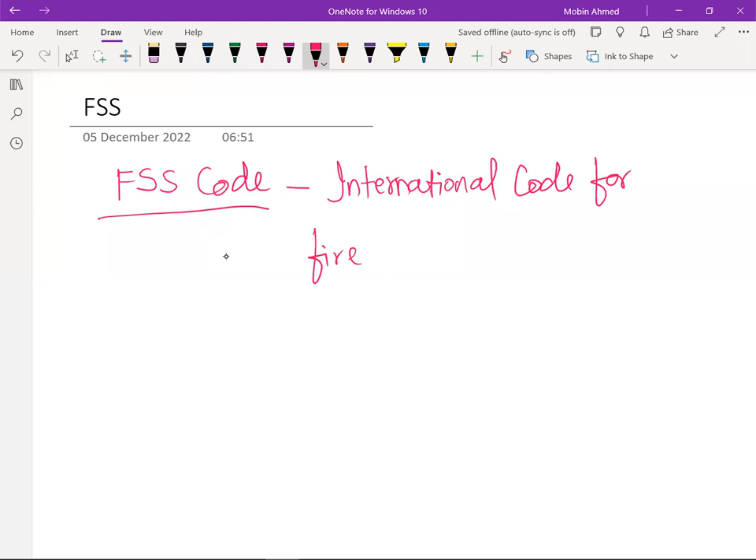Today we'll see about the FSS code, our international code for fire safety systems. This is basically a code, and we must refer to SOLAS also along with this, SOLAS chapter 2-2.

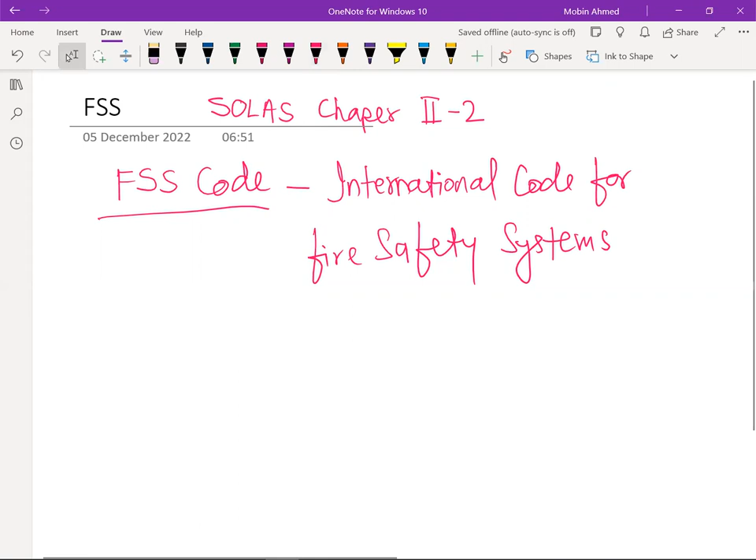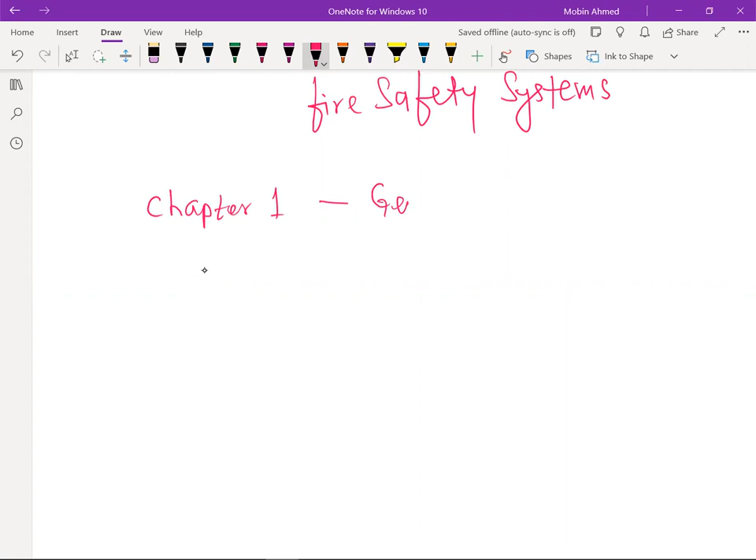In this we are going to have chapter 1, which we will go through chapter wise. Chapter 1 is general, that is general definitions and all that is given in chapter 1. So all the definitions you are going to find here.

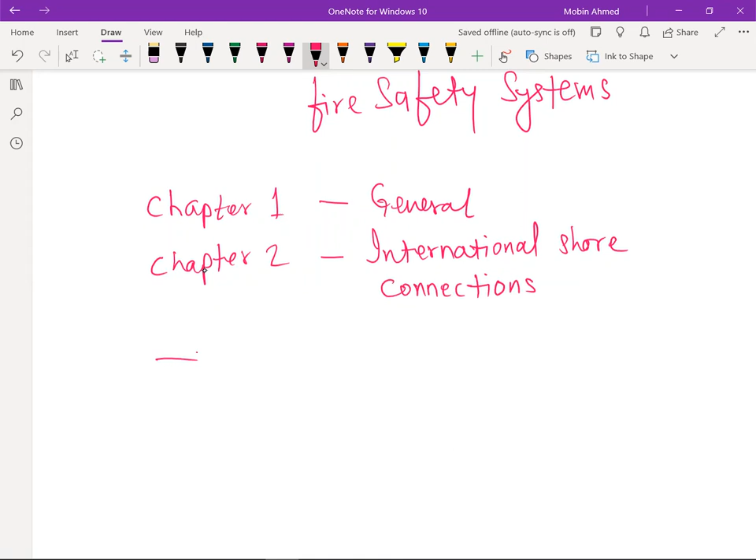Chapter 2 is about international shore connections. Chapter 3, personal protections. Chapter 4, fire extinguishers. Chapter 5, fixed gas fire extinguishing systems.

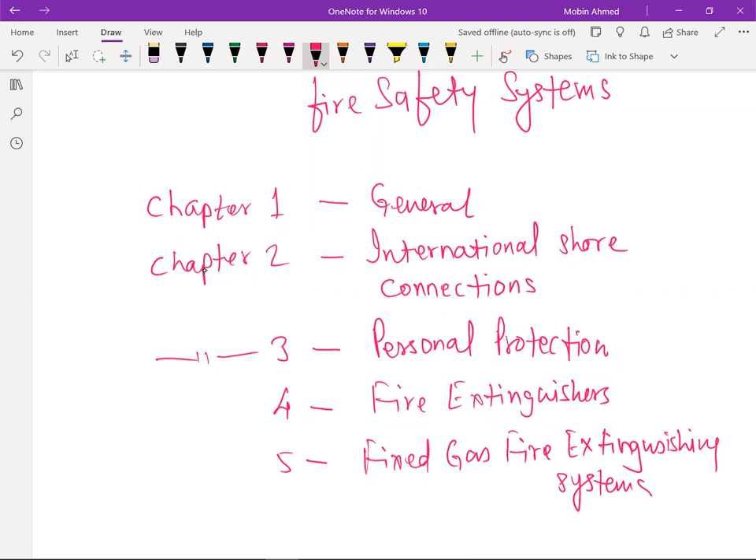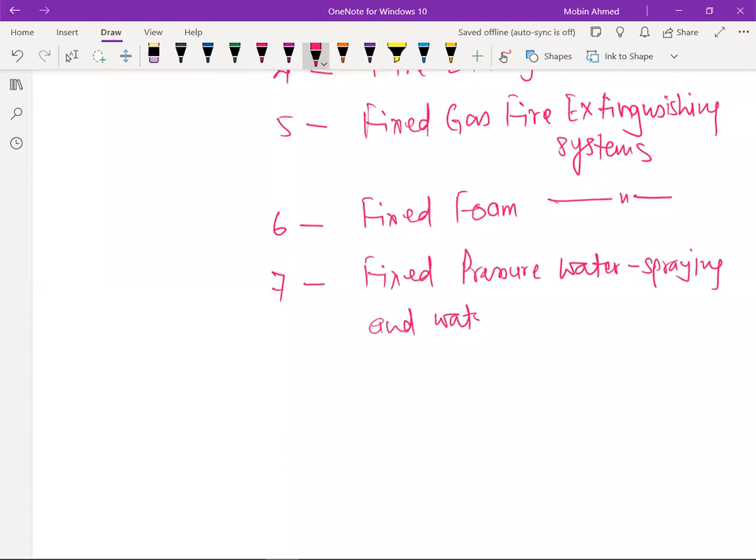Chapter 6, fixed foam fire extinguishing systems. Chapter 7, fixed pressure water spraying and water mist fire extinguishing systems.

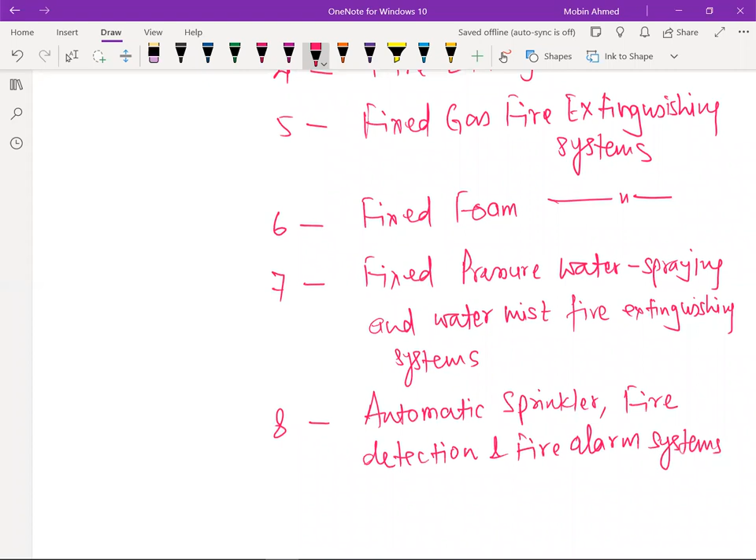Chapter 8 is automatic sprinkler, fire detection and fire alarm system. Chapter 9, fixed fire detection and fire alarm system.

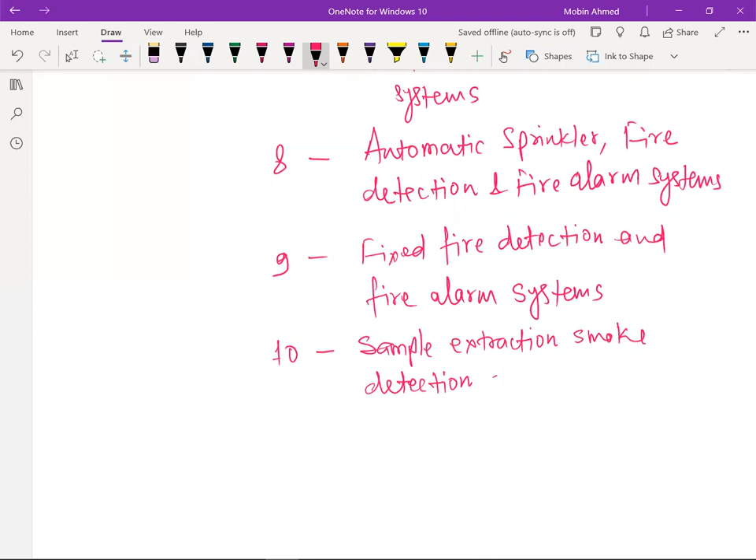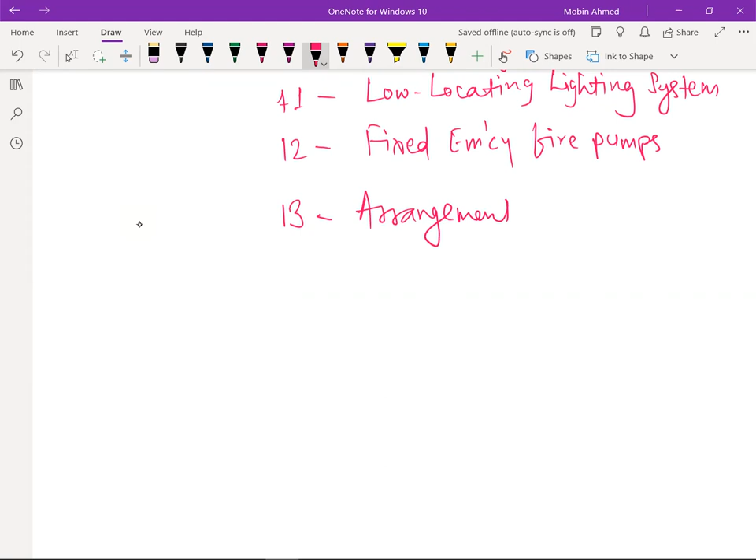Chapter 10, sample extraction smoke detection system. Chapter 11 is low locating lighting system. Chapter 12 is fixed emergency fire pumps. Chapter 13, arrangement of means of escape.

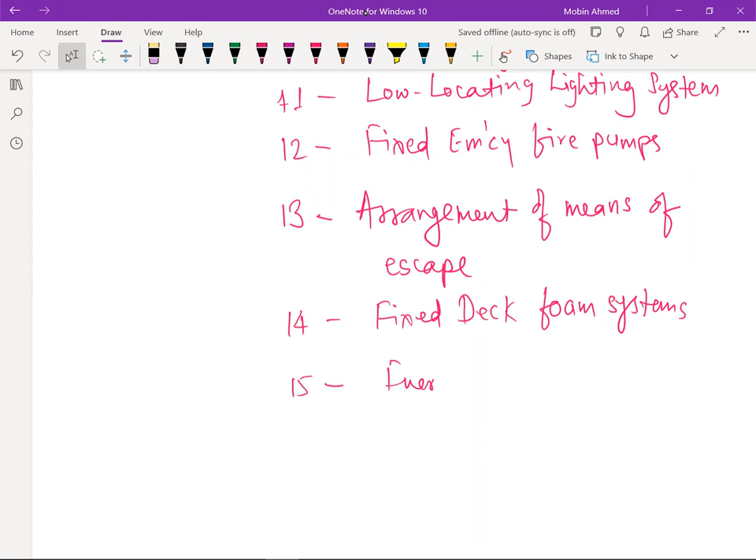Chapter 14, fixed deck foam systems, and chapter 15 is inert gas. Okay, so this is the chapter wise listing. I hope I have completed all, yes, up to 15.

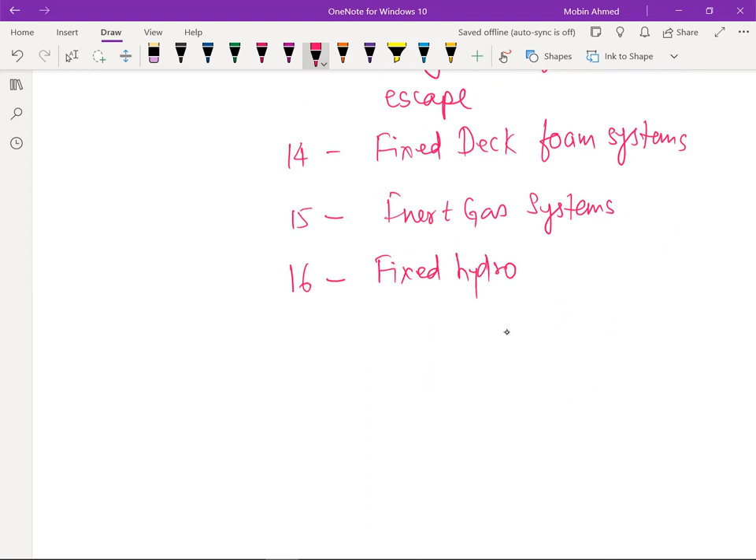Okay, so this deals with FSS along with chapter 2-2. And there is one more, chapter 16, that has come newly, that is the fixed hydrocarbon gas detection systems. It is annex wise also in the FSS, you will find many annexes there, giving all the guidelines in the FSS code. This is the new one, chapter 16, fixed hydrocarbon gas detection systems.

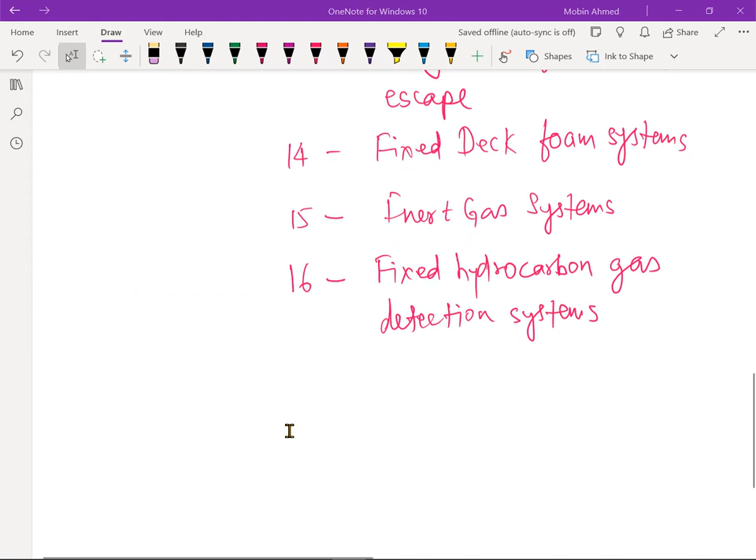Today's topic we will take only the firefighting systems, that is fire extinguishers. Then I will cover fixed fire extinguishers, and all this I will be covering one by one. Today we will cover this part, fire extinguishers.

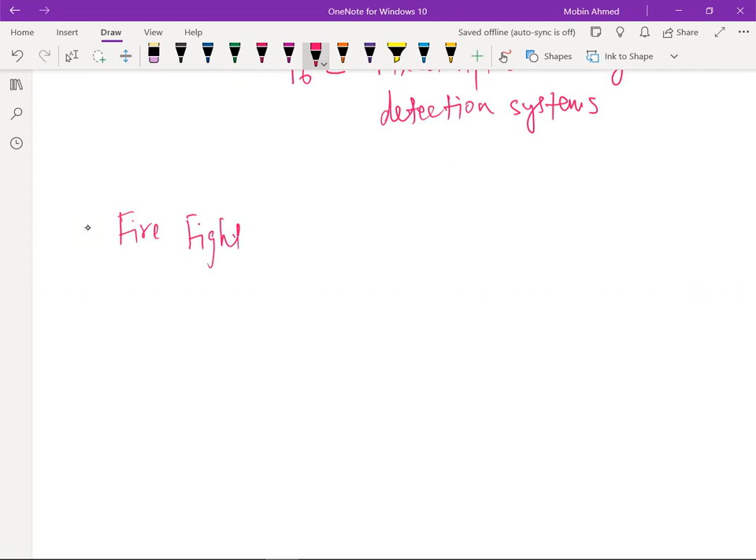Firefighting appliances: if we see the firefighting appliances, in that one we are going to have basically portable fire extinguishers, then fixed extinguishers, then fireman outfit, and other critical appliances.

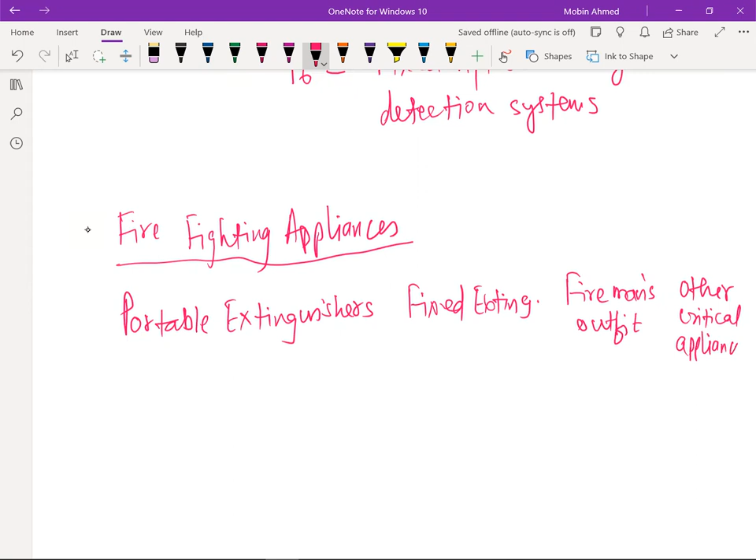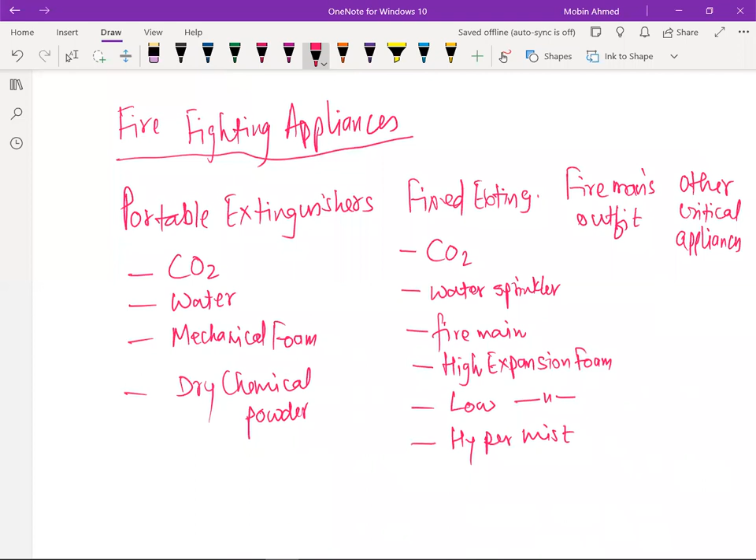Now there are classes of fire. Class of fire, if we see, that is given in the FSS code.

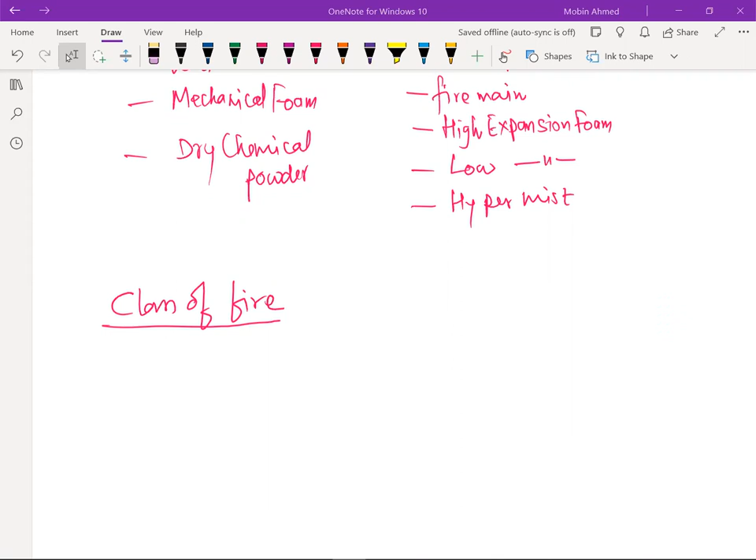So class of fire given in the FSS is class A. This is for carbonaceous material, and we are going to extinguish this fire mostly by using water. That is the class A fire.

Then there is class B. This is about oil fire, we are going to use foam, DCP, or CO2. Class C, that is gas or chemical fire, we use only DCP in this.

Then there is class D, this is a metal fire, we are going to use DCP only. There is nothing like electrical fire, but all these fires can convert into electrical fire, and if there is electrical fire, that is not a class of fire again, it is finished here. There are two more classes of fire, but let me tell you about that also. As per the FSS, it gives the class of fire.

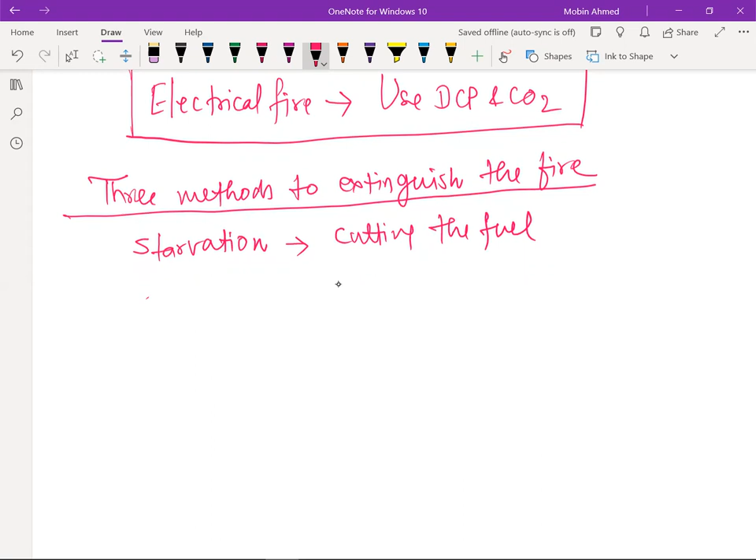Then there is smothering, that is cutting the air, and cooling, that is lowering the temperature. Lowering the temperature.

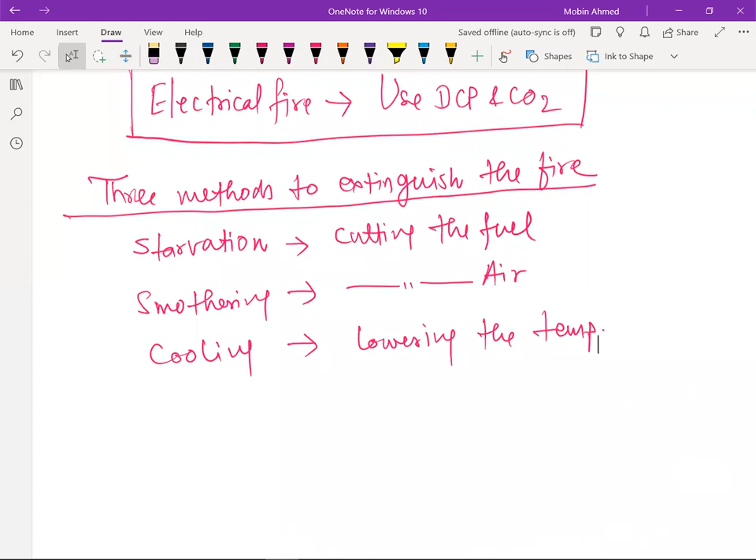Okay. Then there are SOLAS regulations about this. Let's go about this one. So there is a SOLAS regulation, that is Chapter II-2, Part C, Regulation 3. Part C, Regulation 3.

Just wait 1 minute. Okay, let's go about this.

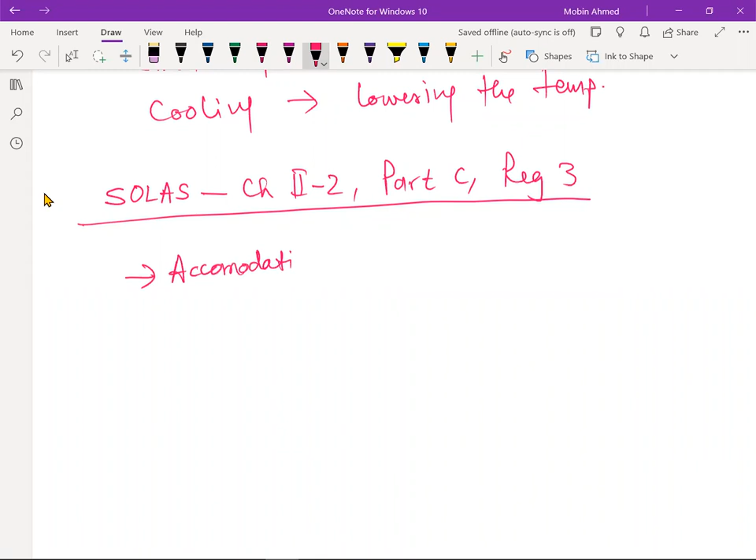So it says that all the accommodation spaces, service spaces, and control stations should have the appropriate fire extinguishers in sufficient number.

Okay, fire extinguishers. Now it says that ships of 1000 GT and upwards are supposed to have at least 5 portable fire extinguishers. So this is about 1000 GT and upwards. They're supposed to have this.

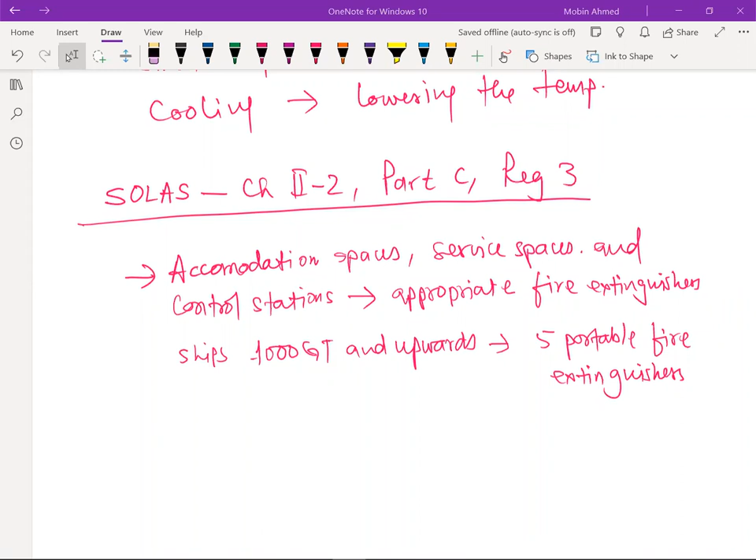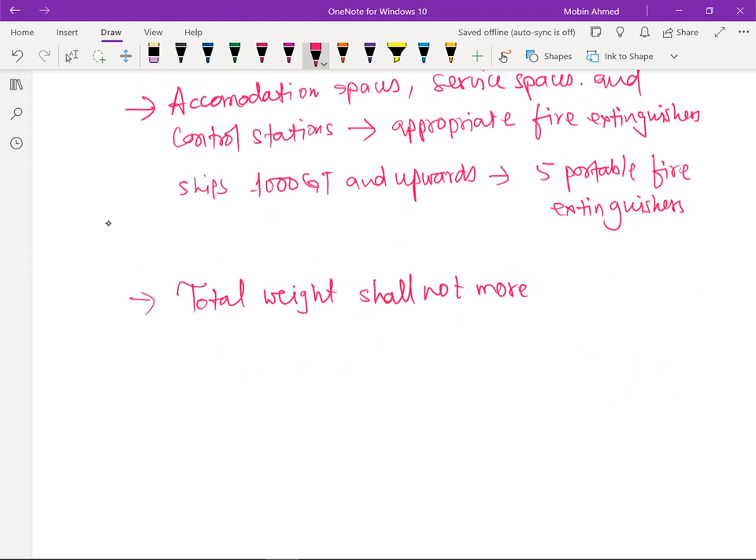And the total weight of any extinguisher shall not exceed, the total weight shall not be more than 23 kg,

and the capacity of fluid not less than 9 liters and not more than 13.5 liters.

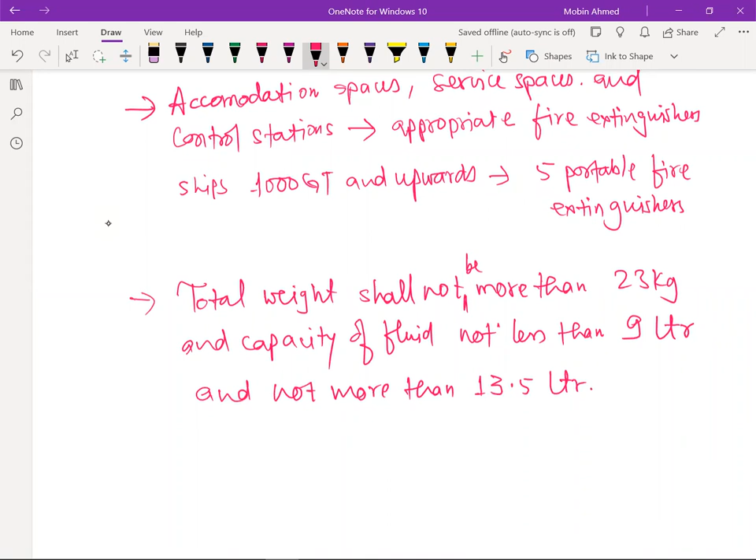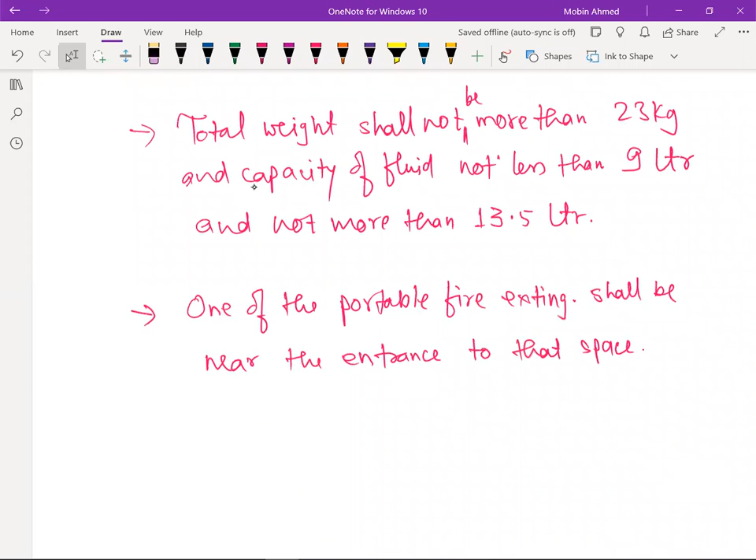Then it also says that one of the portable fire extinguishers shall be near the entrance, wherever we are going to use it, in whichever room or space. So near the entrance to that space. Like if the MSB is there, near the entrance we should have the portable CO2 fire extinguishers.

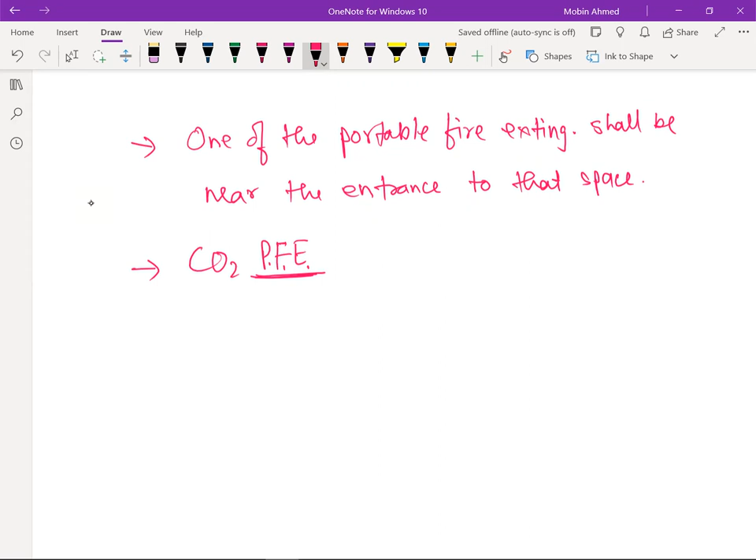Then it says about CO2 fire extinguishers, CO2 portable. Okay, portable fire extinguishers, I am writing in short, PFE. So CO2 PFE shall not be used in accommodation.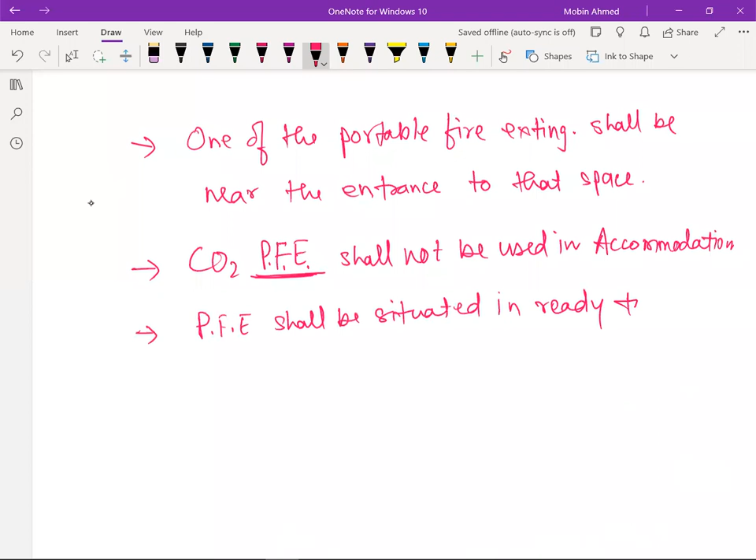Then all the PFEs shall be situated ready to use and easily visible.

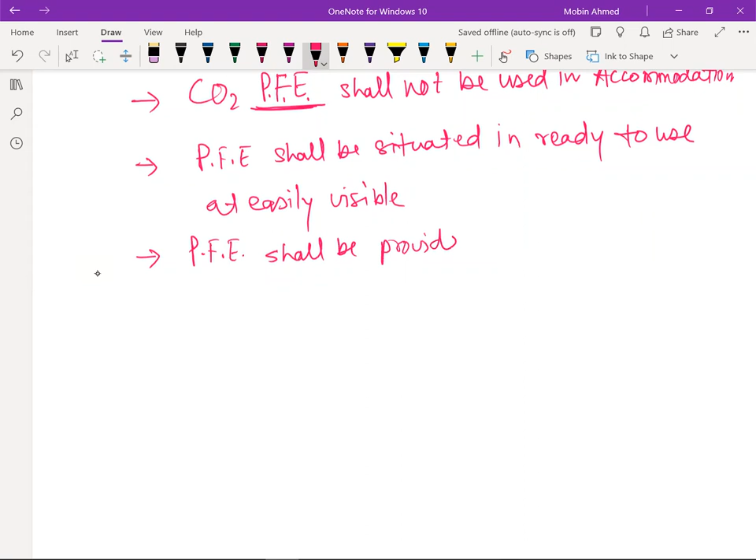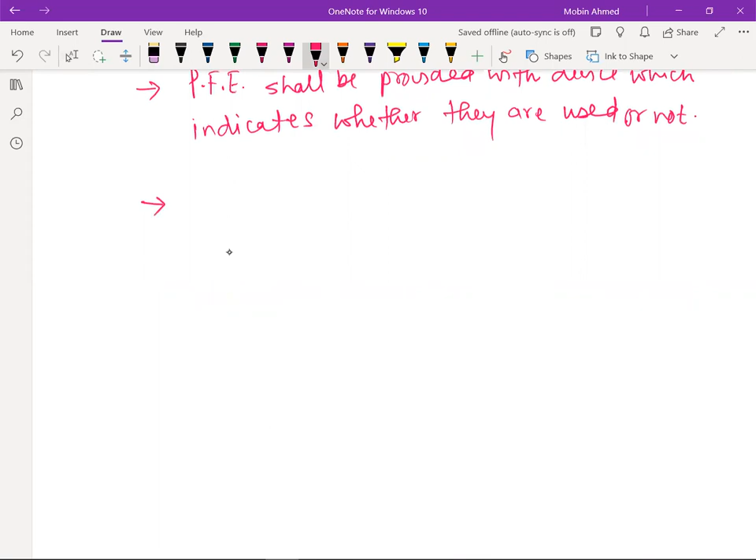Then all the PFEs shall be provided with a device which indicates whether they have already been used or not. If they are used, there's supposed to be some indication on that. So generally, if it has pressure, we have that. If the pressure is less, we know it has been used.

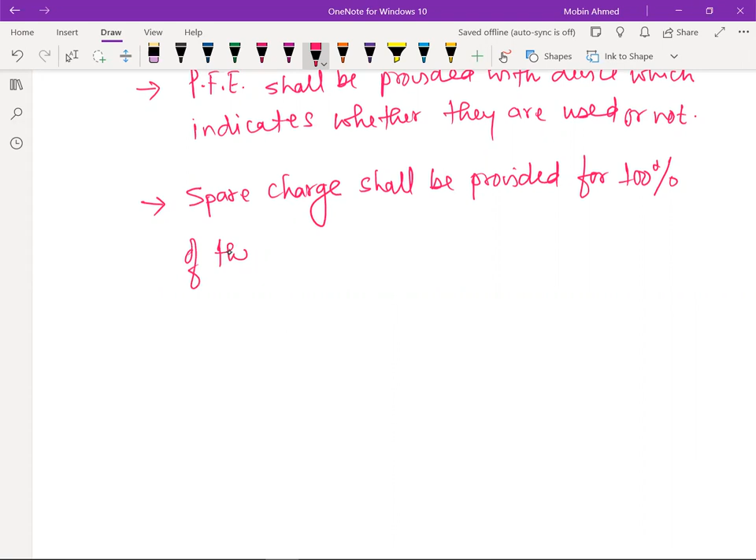The spare charges that we are going to charge. So spare charges shall be provided for 100% of the first 10 extinguishers, or 10 PFEs we write here, and 50% of the remaining PFEs

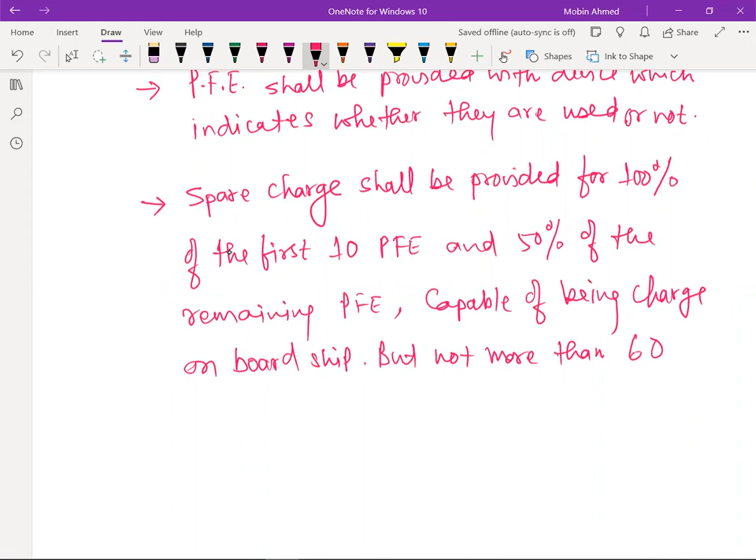capable of being charged on board ship, so we can easily charge them, but not more than 60. Total spare charges, maximum we keep 60 only that are required.

Then it says about portable, I'm writing PFE. For PFEs which can't be recharged on board, additional PFEs of the same quantity, type, and capacity shall be provided. Okay. So the same shall be provided.

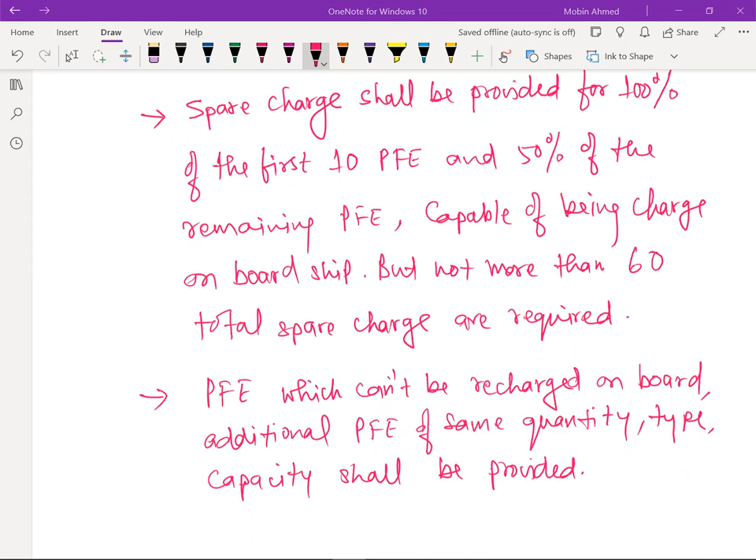Okay. So this is about the SOLAS regulations. I'll give you one showing which type of firefighting is being used, and we'll try to see it. Just wait, I got that one and I'll put it.

Sir, excuse me, sir, I have one doubt. Yeah, tell me. Sir, portable CO2 you have fitted, can it be used in accommodation, sir? No, no. I have already written that in the SOLAS regulation. I said CO2 we cannot use in the accommodation. Okay.

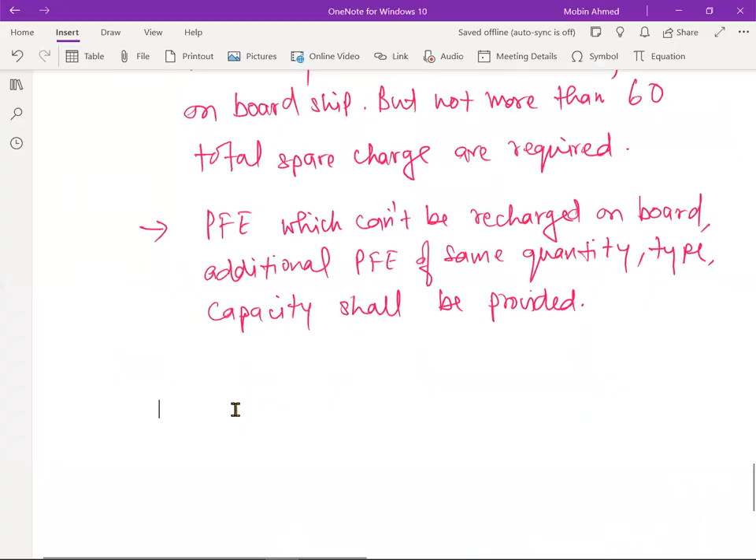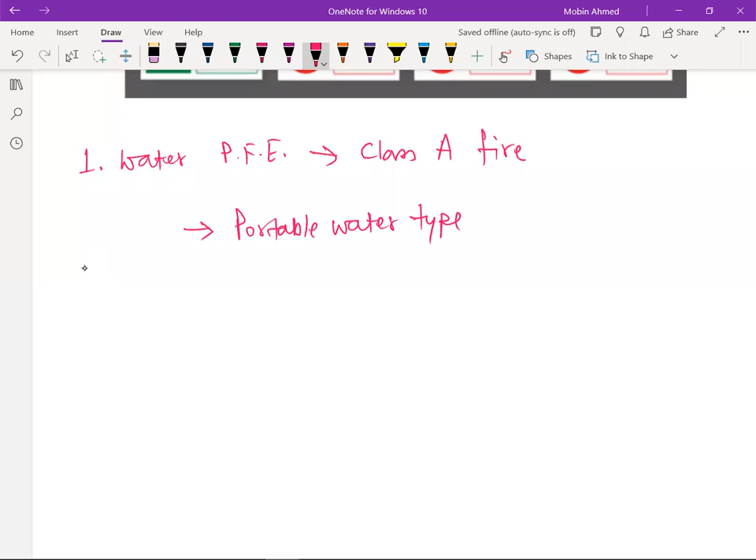Okay, then let's see about water extinguishers first. PFE, portable fire extinguishers. The water one, as you have seen, is used for class A fire only. In this also it is given, it is used only for class A. Generally on board ships for this type, we have the portable water type of 9 liters. In this one, the outer container, we will see that photo also. Okay, let me put this photo.

Okay, insert picture file. This one. So this is the water type. I have taken it from Marine Insight, so it is available there also. You can go through that if you want.

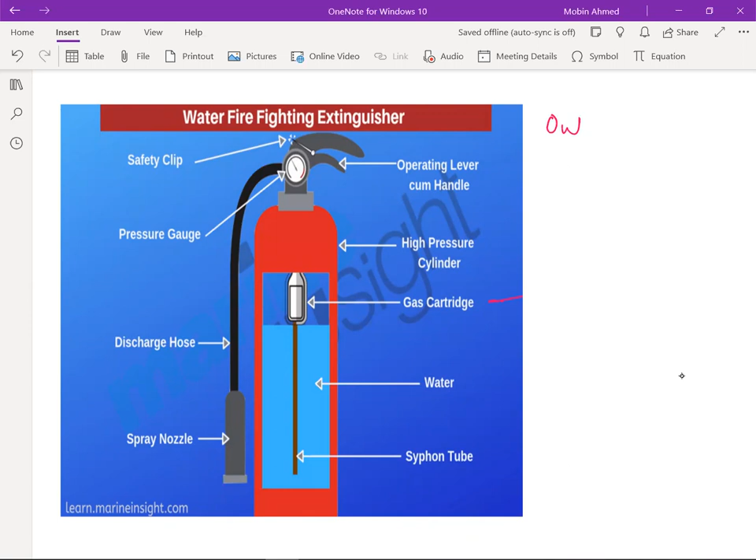So it is going to the outer container. If you see in this one, the outer container is filled with water. And there are two containers. So this is the water, this is the outer container, where we are going to have the water. And there is an inner container. This is the gas cartridge, inner container. So the inner container is having the CO2 cartridge.

How to use this one? First you remove the safety clip; here the safety clip is there. You can see the pressure gauge, how much it is there. Holding the spray nozzle. Then this is the operating lever. Once you operate it, the cartridge gets ruptured. Once it is ruptured, it will force the water to come out. So that is how we are going to operate this one.

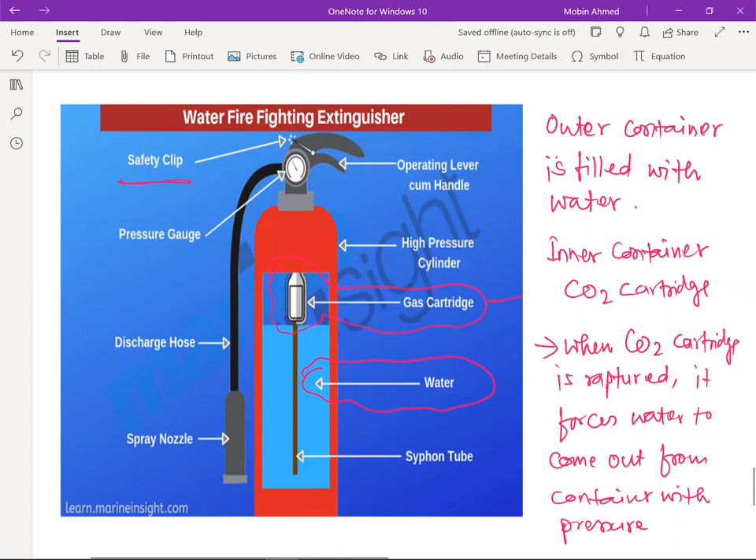So when the CO2 cartridge is ruptured, it forces water to come out from the container with pressure. Okay, so with pressure it is going to come. This cartridge which is there, that is the CO2 cartridge. This is generally 74 milligram and it is having a 36 bar pressure. 36 bar pressure.

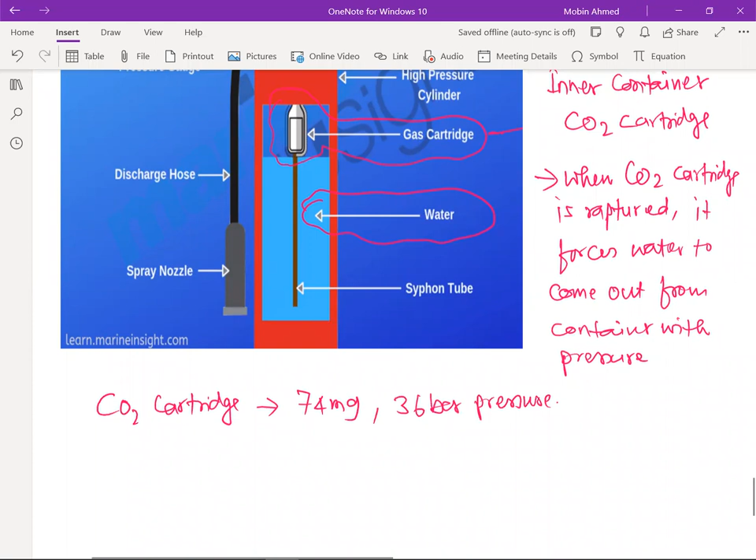How to operate this one? Operating. So carry the PFE nearby the fire scene, wherever the fire is there. Hold the hose towards the fire. Remove the safety pin and strike the plunger. If a plunger is there, you must strike that one. Okay.

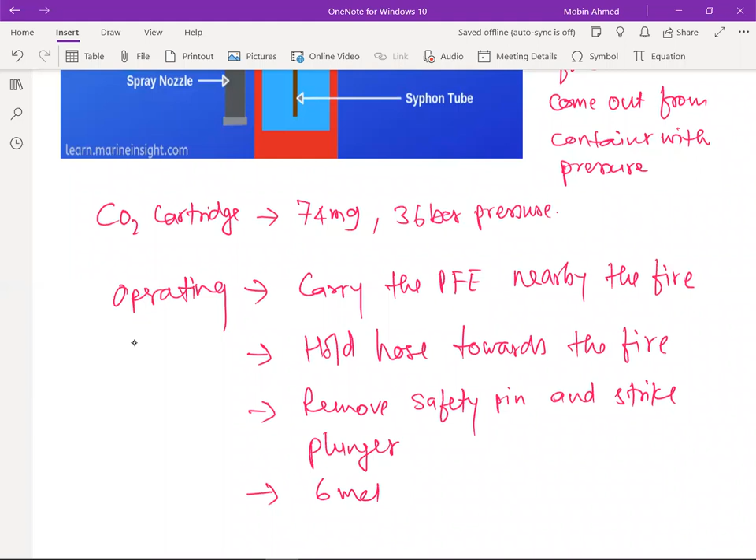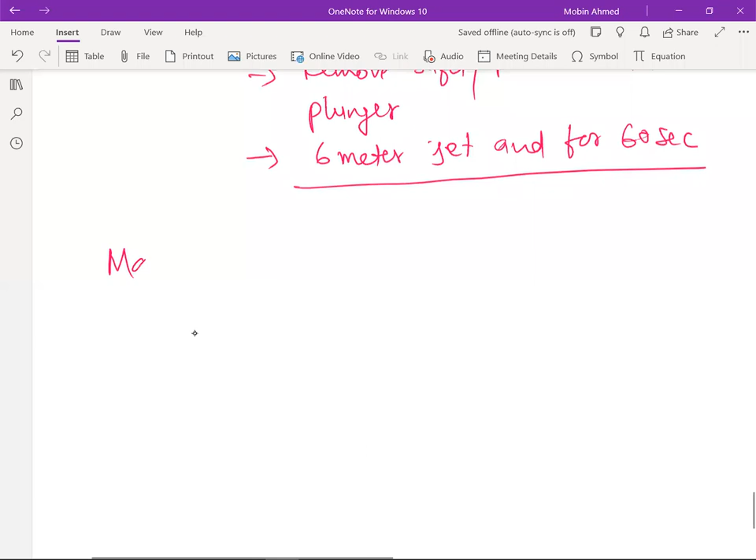So it is going to operate with a 6-meter jet, and for 60 seconds it is going to operate. So it is going to have a 6-meter jet spray, and for 60 seconds it is going to operate. Maintenance. Generally weekly checks and all that are there, weekly and monthly. We'll try to see that also.

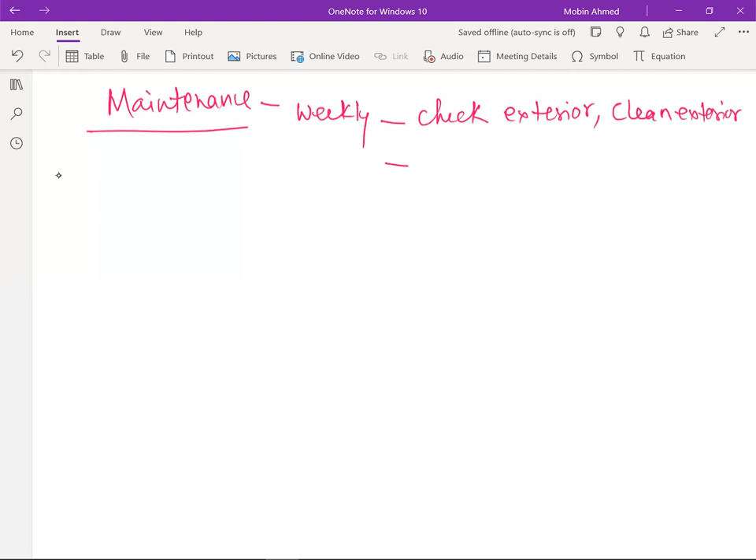Weekly maintenance we need to do in this one. Generally it is not a part of us, but it is safety, so they can ask this question. What maintenance is carried out? So check the exterior, clean the exterior. Check the nozzle, outlet, and clean. Then check the relief hole. There is a relief hole in that one, and clean it. There are going to be monthly checks in this.

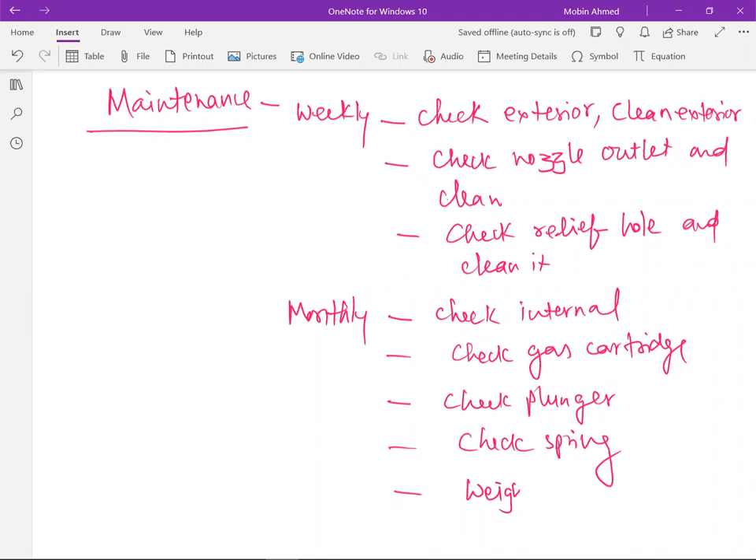Again, check internal. Check the gas cartridge. Check the plunger. Check the spring. And weighing is supposed to be done, weight of the cylinder. That is the monthly.

Then there is a yearly pressure test that will be carried out. So generally this pressure test is carried out at 35 bar before recharging. So a vendor is going to take it and do this. Generally technicians come from the outside and they do it.

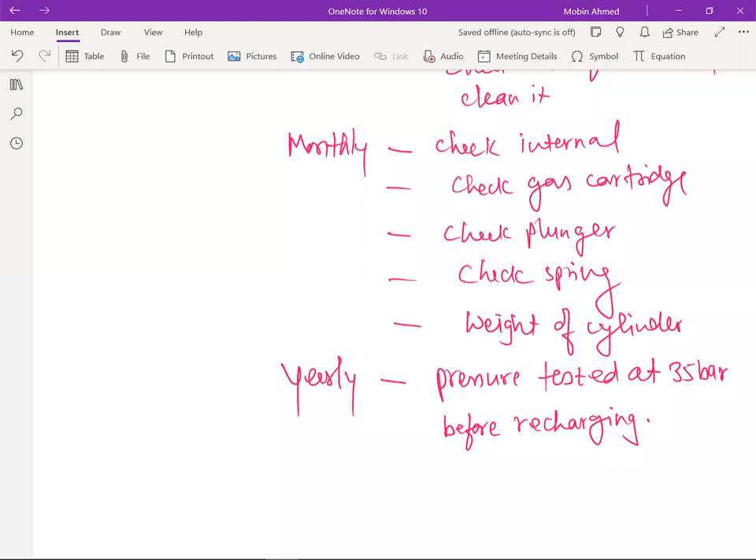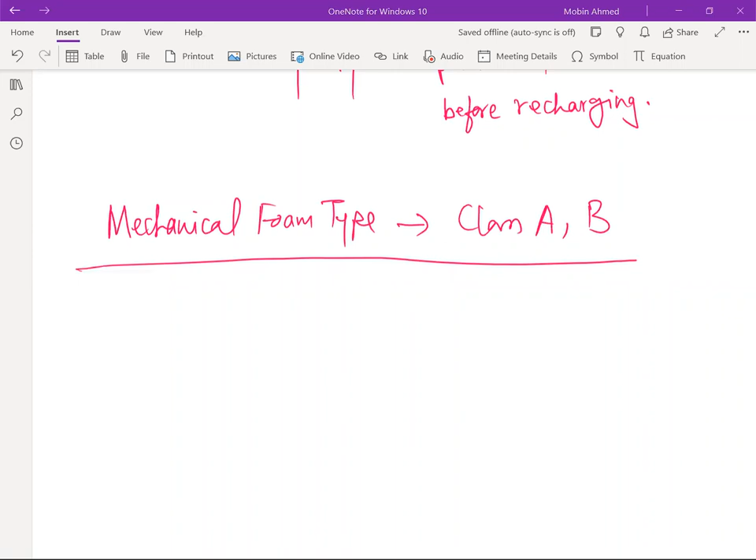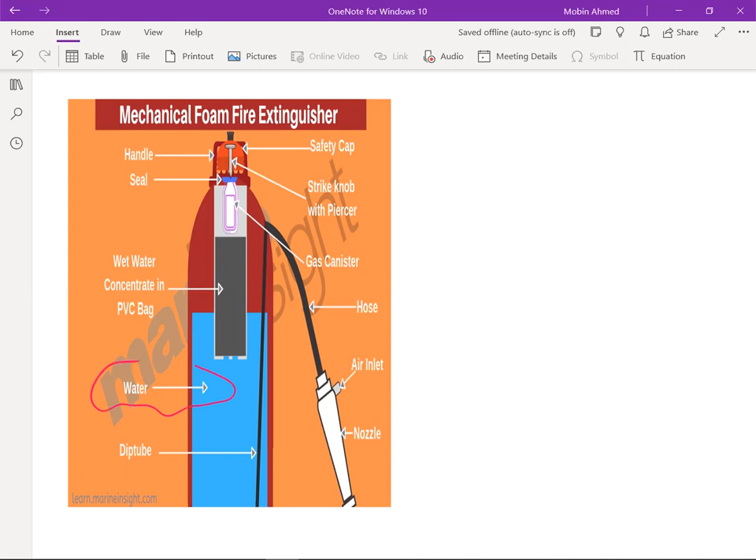Then let's see about the mechanical foam type. Mechanical foam type. This is used for class A and B both. Let us put the picture. So this is a mechanical foam type. It is also having the same outer and inner. So the outer one is filled with water. So the outer container, you can see here, this is the water outer container that is having the water. And we are going to have the inner container.

In this, we are going to have the CO2 cartridge and foam solution. Okay, so this is the foam solution. And this is the cartridge. Then we are going to have the dip tube. You can see here, it goes down to the bottom. Okay.

Now, the central parts here: we need to remove this safety cap and strike this plunger. This is going to pierce the cartridge. Once it is pierced, the CO2 will come out and pressurize, and the foam is going to mix with the water and come out through the nozzle. At the nozzle, the Venturi effect will be there. There is an air inlet, and the water and foam mixing comes through the nozzle, and due to the Venturi effect, it is going to create a mechanical foam. So that is how it is going to be operated.

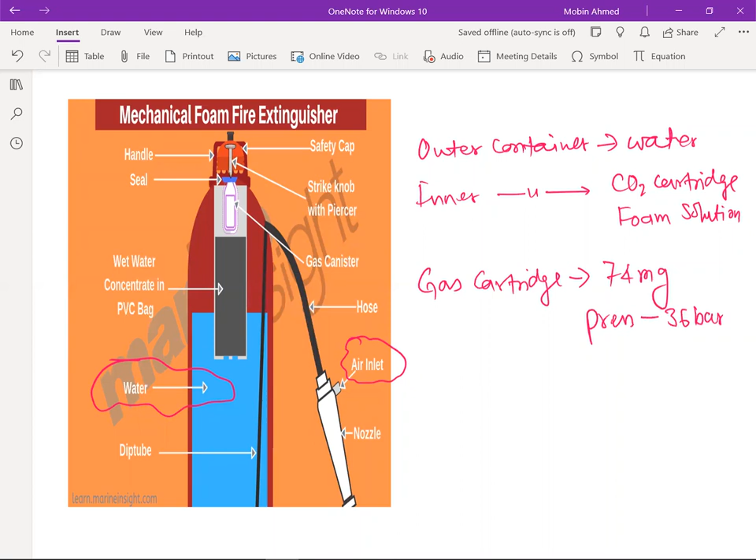Now this gas cartridge is again there, having the same weight, 74 mg, and the pressure of this one is 36 bar. Duration again: 6-meter jet, for 60 seconds.

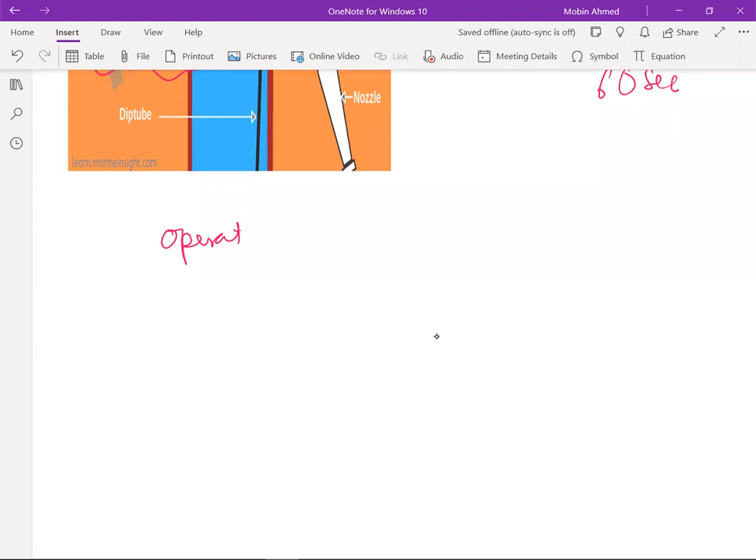Now, how to operate this one? Same, carry the PFE. So can you scroll down a little bit? Yeah, 1 minute.

Okay. Carry it near the fire, then hold the nozzle towards the fire surface. Remove the safety pin and strike the plunger.

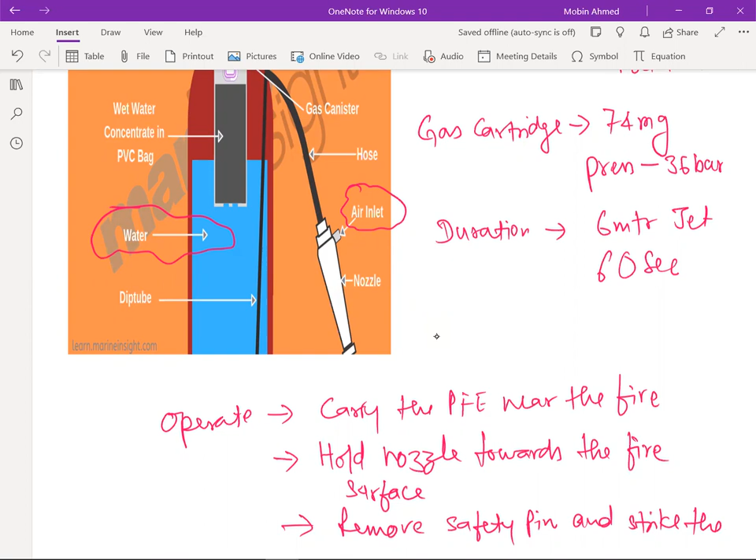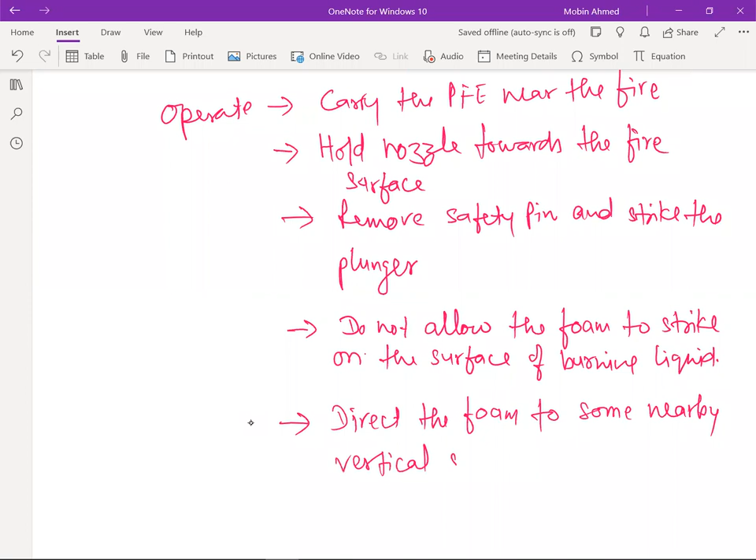Now here do not allow the foam to strike, because it is going to have a jet pressure. So do not strike on the surface of burning liquid. So we need to direct the nozzle, direct the foam to some nearby vertical surface so that the foam runs down the side and blankets the liquid.

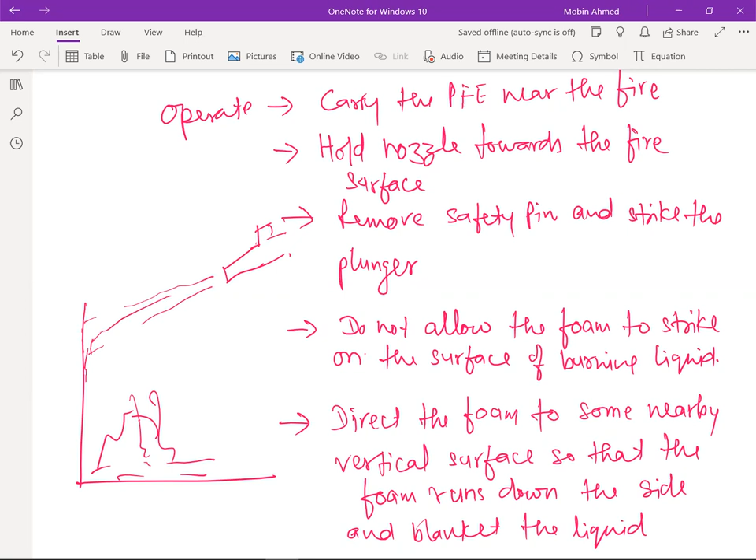So generally, like we have a surface here like this. Okay, and suppose we are going to have a fire here. So this is a fire, liquid fire is there. So when we are holding this nozzle, the foam which is coming is supposed to come here, and slowly it will come and it is going to blanket this one. Okay, it will slide like this and blanket.

So always, if any vertical sides are there, we must use them. We must also do the sweeping movement. Okay, sweeping movement is required so that foam is distributed equally everywhere. Okay. Maintenance part is the same. Whatever is there in that one, it is the same.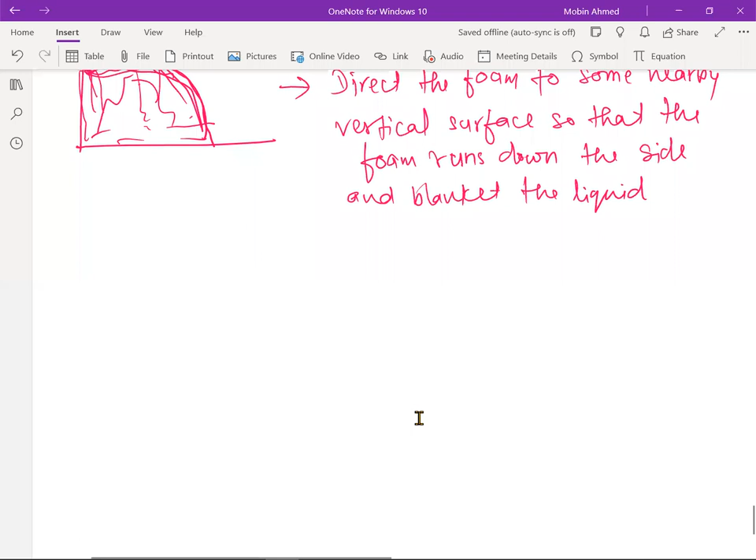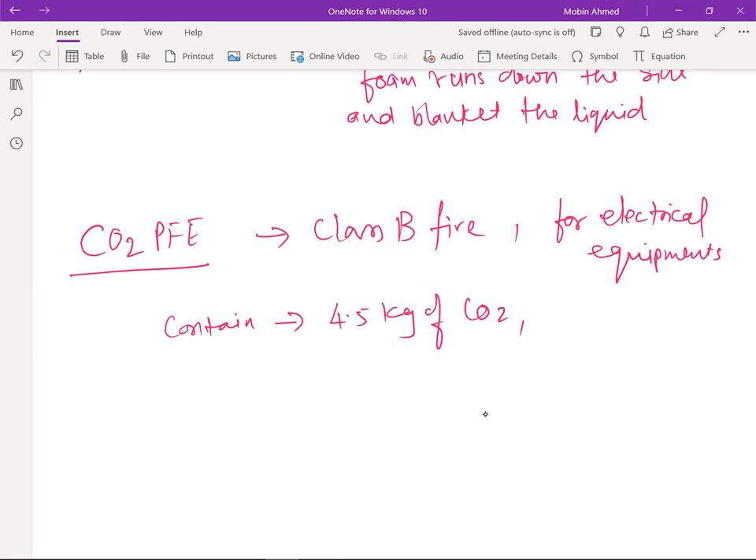Okay. Now let's go for the CO2 extinguishers. CO2 PFE. This is used for class B fire and for electrical equipment. Okay, so it contains 4.5 kg of CO2, 53 bar, so that is the pressure. Duration: 3 to 4 meter length for 20 seconds.

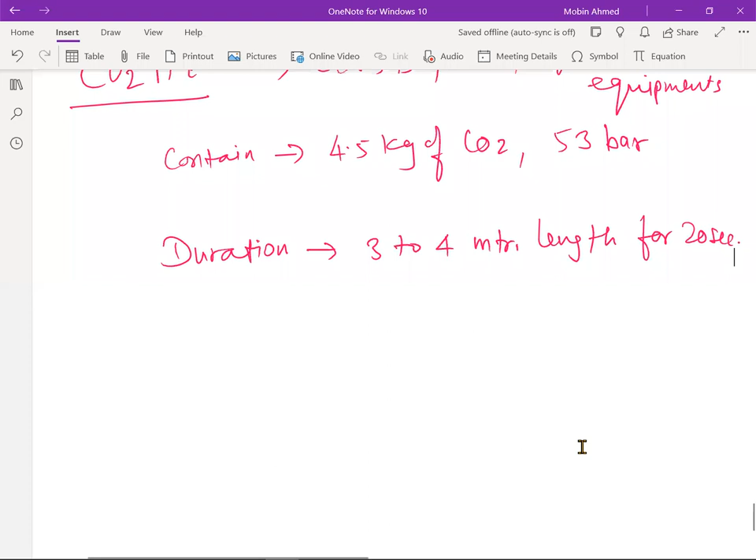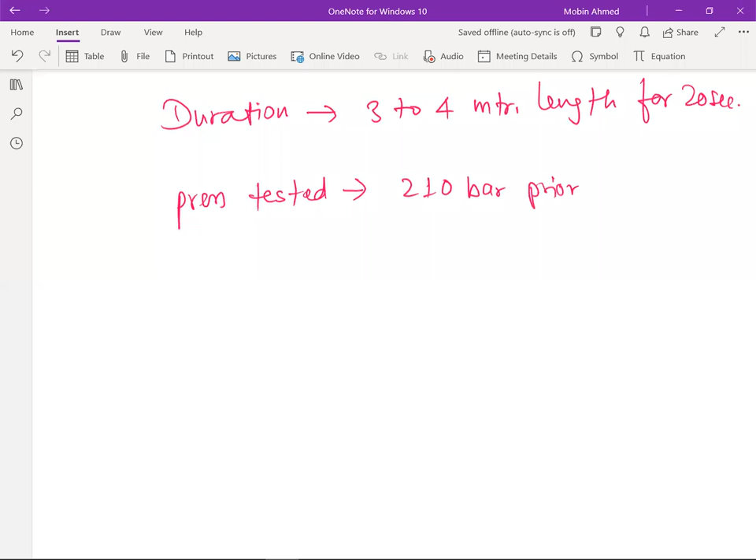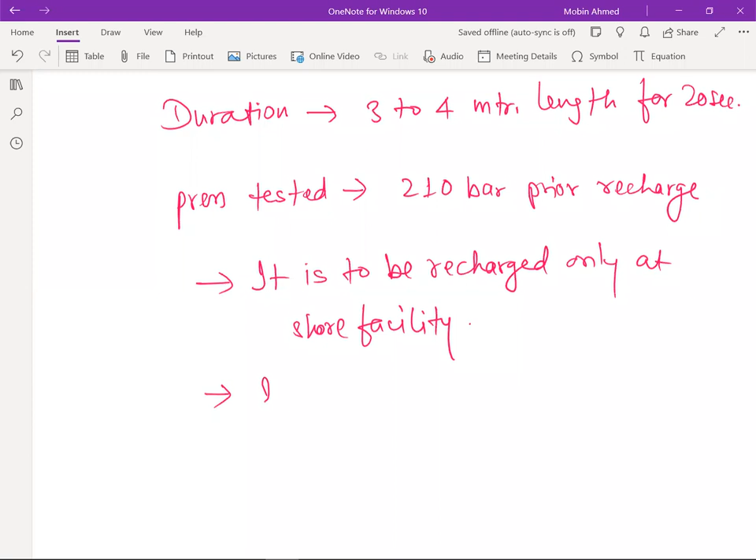It should have the pressure testing. So the cylinder should be pressure tested at 210 bar prior to recharge. So again it is to be noted that it is to be recharged only at a shore facility. So authorized shore facilities are going to recharge that one. Second, we should note that it should be at least 750 mm

above the floor level. Okay, it should be 750 mm because it has the gas which can expand. Okay, so your internal pressure is going to increase or decrease. So it may increase, and that will be a problem, and that's why we are going to store this one at 750 mm height. Okay. Let me put the picture first.

Okay. I think this CO2 is used for class B fire. Class B, no? Yeah. And electrical.

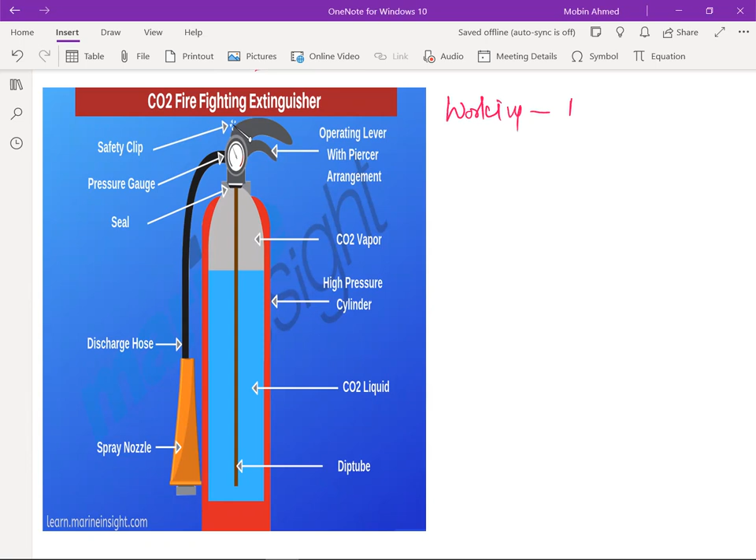Working is the same: remove the safety pin, okay, then direct the hose at the base of fire and operate the lever. Do the sweeping action across the surface on burning materials.

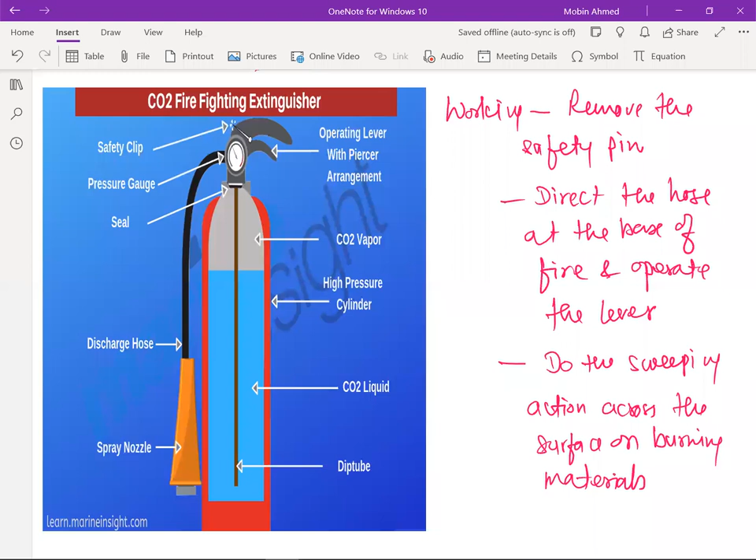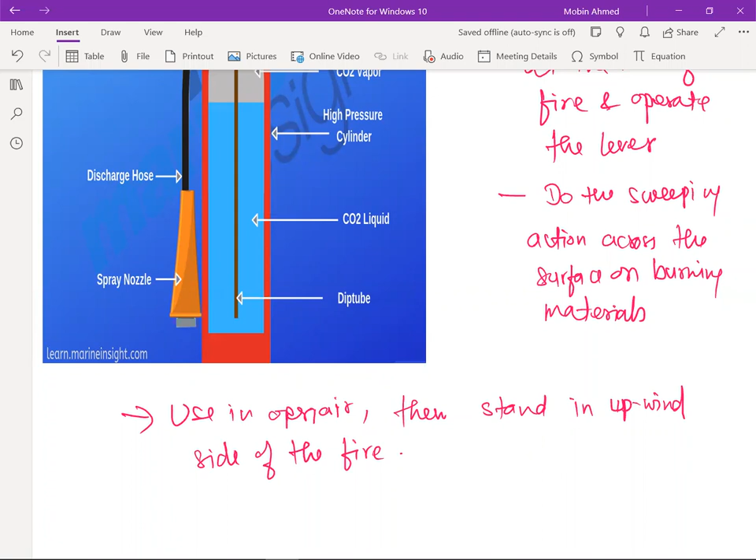Now, generally, when we are going to use it in open air, then we must stand on the upwind side of the fire. Now, when it is going to be used for the electrical equipment, okay, this is important, the supply must be switched off. Remember this one,

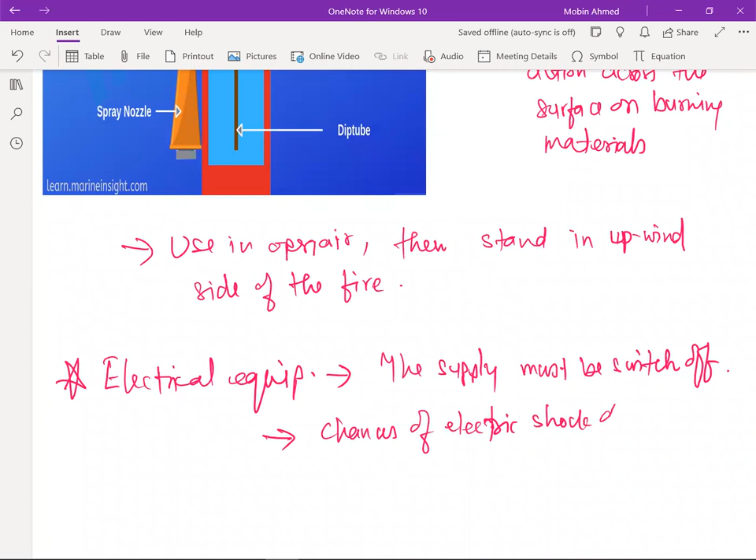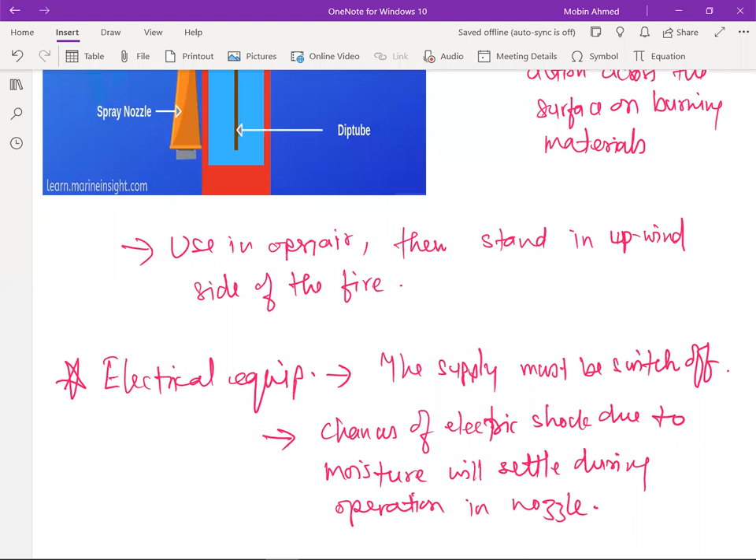otherwise, because it is coming with a very high pressure, the moisture is going to settle in the hose, the nozzle, where you are going to hold. And due to that moisture, you will get a shock. So there are chances of electrical shock. Switch off. Electric shock due to moisture which will settle in the nozzle during operation, because it also cools down. Very high pressure when released cools the surrounding areas, and moisture will settle immediately.

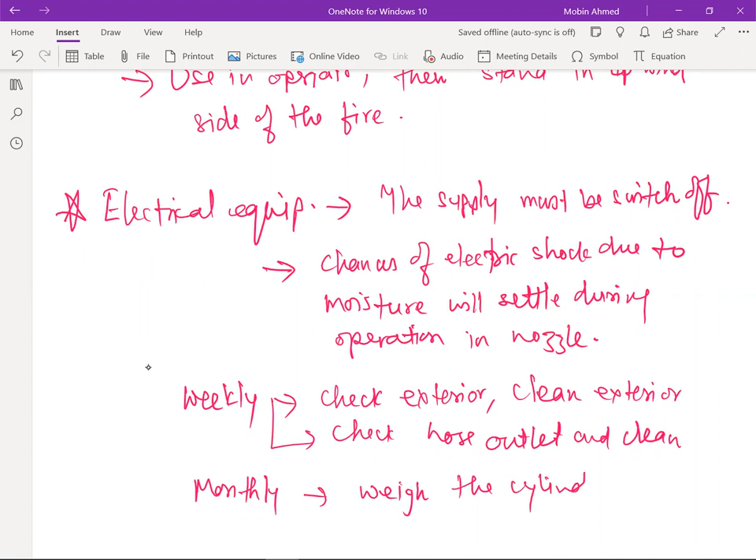Okay, weekly routine is the same: check exterior, clean exterior, and check hose, outlet, and clean. Monthly, weighing is required, so weigh the cylinder. If it is 10% less, send for recharging. Okay. Yearly, there has to be a pressure test carried out at 210 bar before recharging.

Okay, that's it for today. Tomorrow we'll see the dry chemical powders and fixed firefighting systems also. Okay. Semi-portable extinguishers also we'll try to cover. So thank you very much.

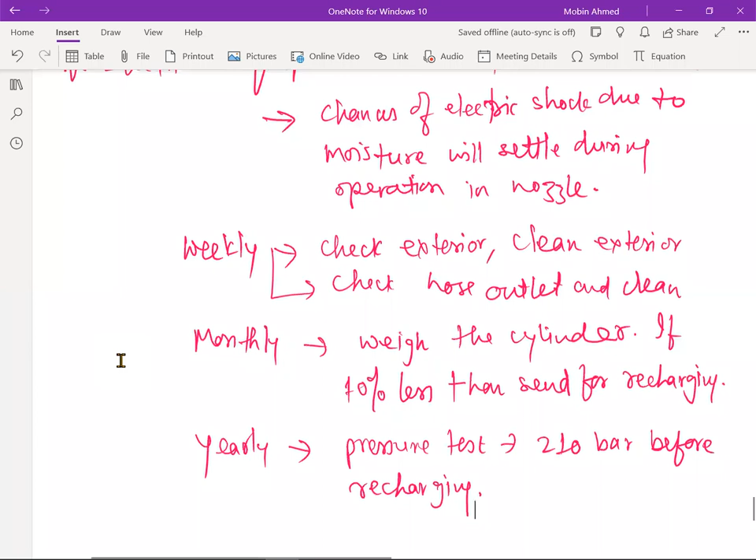One thing, just repeat, I missed some portion. Electrical fire does not come under any type, right, sir? Yes, it doesn't come under any type. Already I have mentioned here. So this fire is not coming at all in any of these. As per the ISO and as per the NFPA, which the FSS refers to, we have only these categories of fire: A, B, C, D, F or K. F is for the cooking oil, K is also for cooking oil, but F is by the ISO and K is given as per the NFPA.